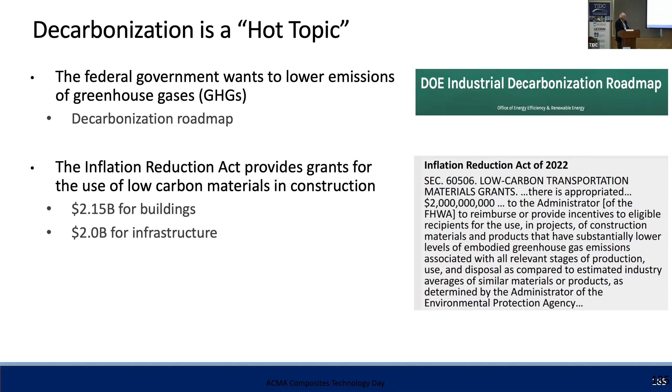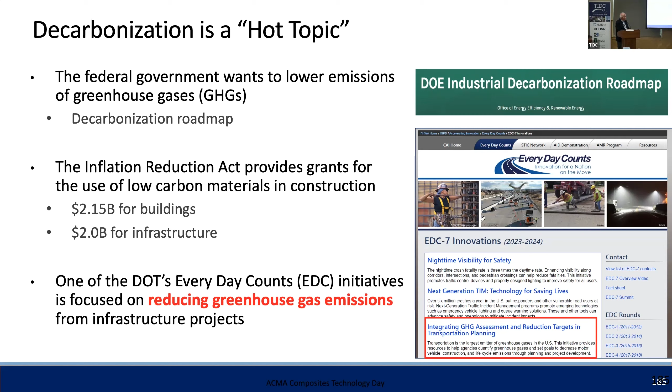One of the Department of Transportation's current Every Day Counts, or EDC-7 initiatives, is focused on reducing greenhouse gas emissions from infrastructure projects. That's hard to get used to.

So with that background, here's an outline of my talk. I'm going to give you a little bit more terminology. Then I'm going to tell you about some sources of data for embodied carbon calculations. Then I'm going to show you some examples of both lower cradle-to-gate and cradle-to-grave CO2 emissions with composites.

I'm going to give you my take-home message now and then repeat it at the end of my talk. My take-home message is that the use of FRP composites can lower embodied carbon and CO2 emissions in construction and infrastructure applications. It's a very simple message, but I hope you'll see it's true for both cradle-to-gate and cradle-to-grave emissions as I go through the rest of my talk.

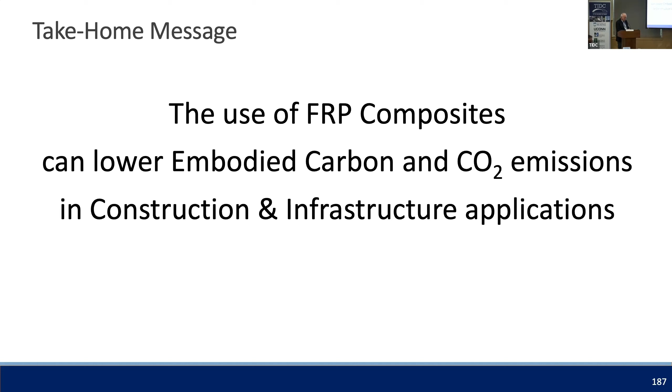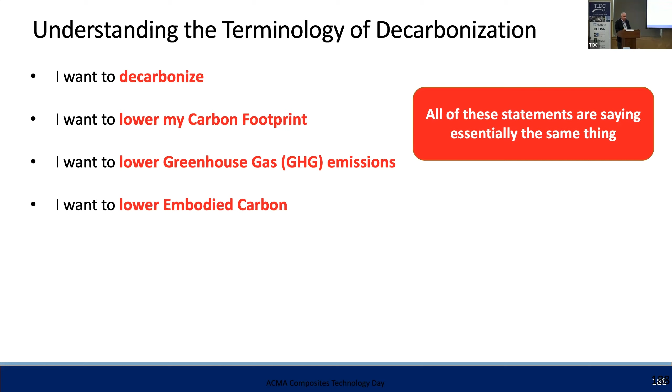So people say they want to decarbonize, but different people say it in different ways. Some people say that they want to lower their carbon footprint. Others say they want to lower greenhouse gas or GHG emissions. Still others would say, I want to lower embodied carbon. The point that I want to make is that all these statements are saying essentially the same thing. Everybody wants to lower emissions of carbon dioxide.

And then there is upfront embodied carbon, or cradle-to-gate emissions, which focuses on the greenhouse gas emissions released before a building or another structure is constructed. These are also referred to as supply chain emissions or product stage emissions. Again, they are the upfront embodied carbon, the upfront cradle-to-gate emissions.

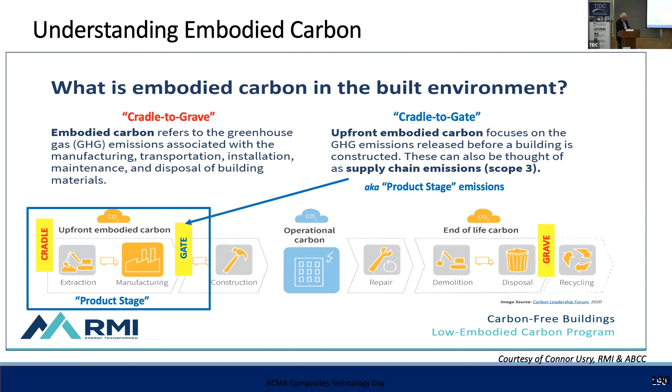A little bit more terminology. Everyone wants to lower carbon dioxide because it is the most abundant greenhouse gas, but it is not the only greenhouse gas. Gases like methane and nitric oxide are also greenhouse gases, and each of those gases has what's called a global warming potential, or GWP. And that GWP is used to calculate equivalents of CO2 emissions. So now let's talk about some sources of embodied carbon calculations, sources of data. The most common unit is kilograms of CO2 equivalents, and you will see this acronym, kilograms CO2e, for kilograms of CO2 equivalents, and you'll see it repeatedly during the rest of my talk.

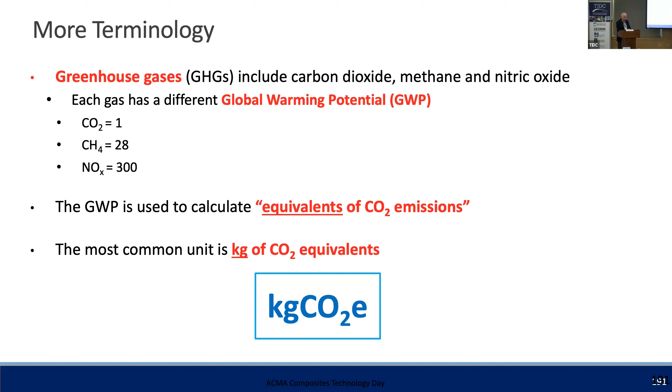I also want to make the point that it's very important to watch the units when you're going through this database, because this data for steel is given in kilograms of CO2 equivalents per kilogram. But if you look at the data for concrete, it's in kilograms of CO2 equivalents per cubic meter.

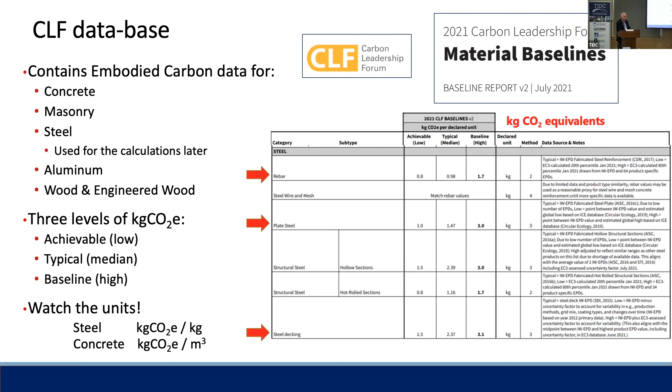A little bit more about the scope of the CLF database, and this comes right from their description of their database. The CLF Baselines report gives you product stage carbon impacts, or cradle-to-gate impacts. They point out that these emissions comprise the majority of embodied carbon impacts for the majority of materials.

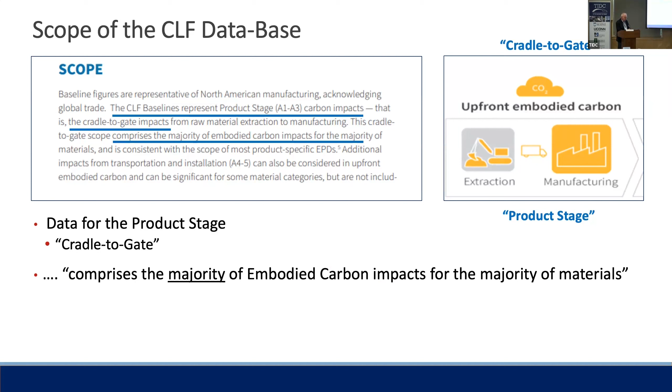Now let's look at some source data for FRP composites. Here we're looking at the life cycle inventory from ACMA. Again, this is cradle-to-gate, which is the same as the CLF database. This database contains embodied carbon data for unsaturated polyester resins and e-glass. It also contains data for composites prepared by different fabrication methods.

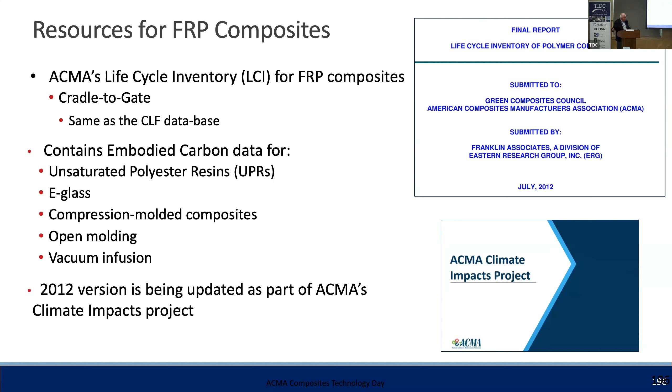This version is from 2012, and it is being updated as part of ACMA's Climate Impacts Project, which was launched last year. Here's the type of data that appears in ACMA's LCI.

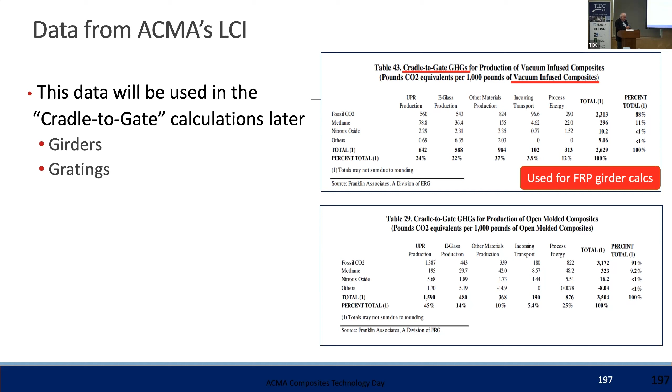Again, you're talking about cradle-to-gate data. Here's the cradle-to-gate emissions data for vacuum-infused composites. I'm going to use it for the FRP girder calculations in just a little bit.

And here is the data for open molded composites, which are going to be used for the grating calculations that I'll show you. Again, if anyone would like a copy of this LCI, email me after the fact.

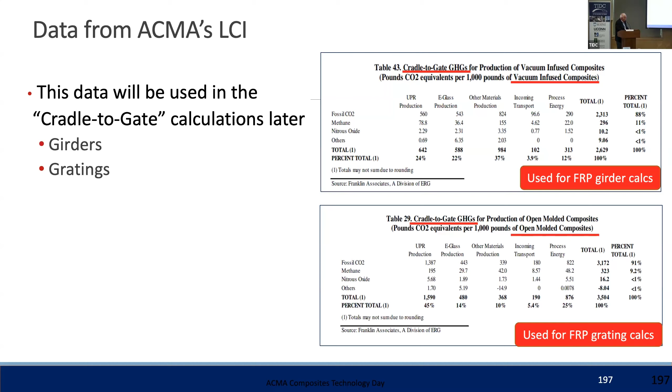And finally, we get to environmental product declarations, or EPDs. These are also typically cradle-to-gate. Some of them do contain emissions data for downstream emissions. I have found that buildingtransparency.org is a very useful resource for EPDs.

Here I'm showing you the EPD for FRP rebar from Schock, a German company, and I'm going to use the data in it for the rebar calculations shortly.

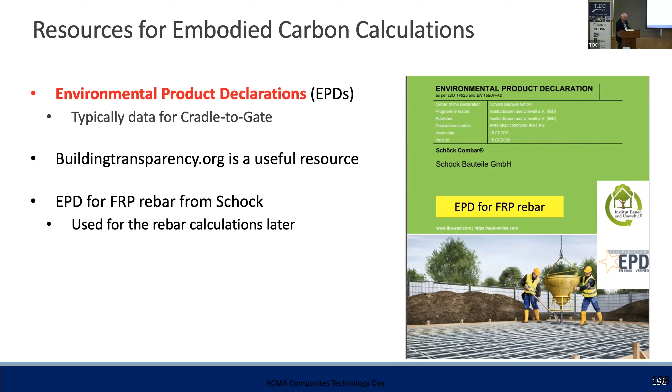Here are some of the emissions data from that EPD. I'm going to highlight 2 sections of this table. At the top, you've got a description of the different stages, and what we're focused on here is the product stage that I defined earlier. That's the same as the CLF database for steel. Then you've got the emissions data for that product stage, given in kilograms of CO2 equivalents. I'm going to use this data for the rebar calculations.

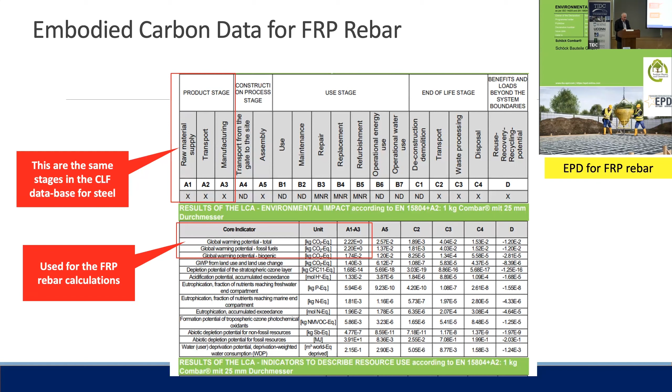So the point I want to make is that I've shown you 3 different data sources, but using data from these 3 sources enables apples-to-apples cradle-to-gate comparisons.

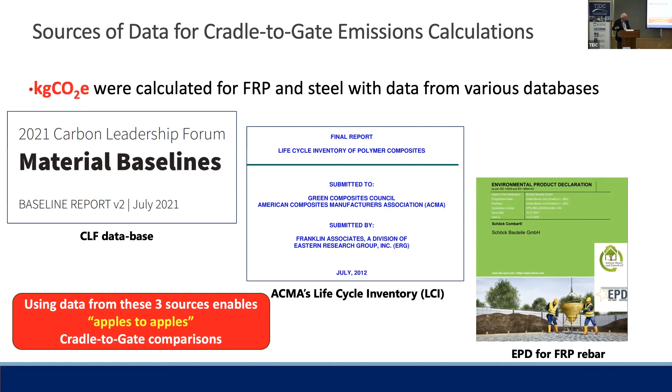So now let's show some comparisons, some calculations for cradle-to-gate. I'm going to show you 3 different comparisons: FRP and steel rebar, FRP and steel girders, and FRP and steel gratings. Again, cradle-to-gate.

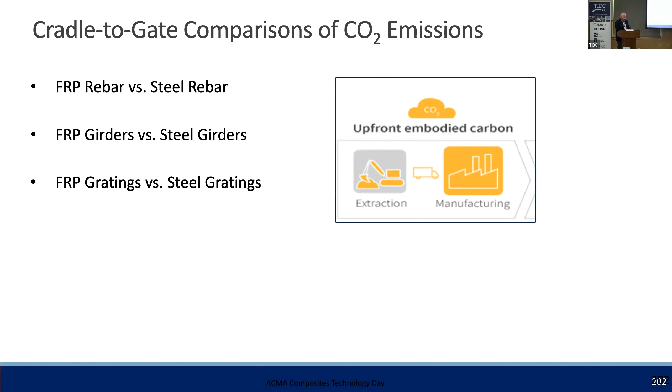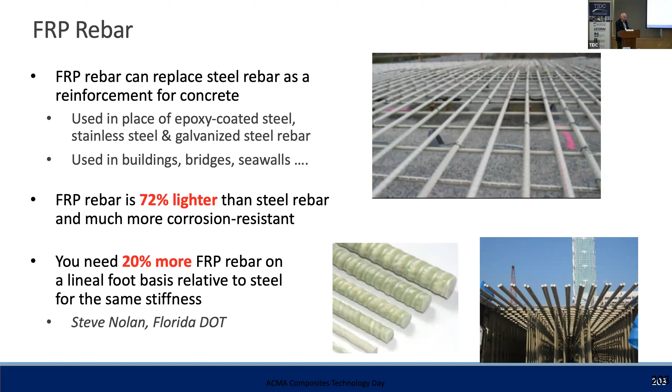So let's talk about FRP rebar. John talked quite a bit about it in his talk. It can be used as a replacement for steel rebar in concrete. It's used in all kinds of buildings, bridges, and seawalls. It is 72% lighter than steel rebar and much more corrosion resistant. But when you use FRP rebar, you need to use 20% more on a lineal foot basis relative to steel to achieve the same stiffness. That's per Steve Nolan from the Florida DOT, who I want to acknowledge here, and I'll mention again later when I talk about the Halls River Bridge LCA.

So now let's do some math. What I'm comparing here is steel rebar versus FRP rebar. For the steel rebar, this column contains the source data. I'm using the CLF database, and remember there are 3 different levels given. Here are those values for kilograms of CO2 equivalent per kilogram. To keep the math simple, I've made it weigh 1,000 kilograms. This column is simply the product of these 2 columns.

Then I come down here for FRP rebar, and now I'm using the data from the Schock EPD. When I calculate the weight, this number reflects the fact that FRP is 72% lighter, but that you need 20% more. When you take this product, you get 739, which is much lower than the values higher up in this column. When you do the math, this new column shows the percent reduction that is possible with FRP. The data shows that CO2 emissions are at least 8% lower with FRP rebar, 25% lower than for typical steel rebar.

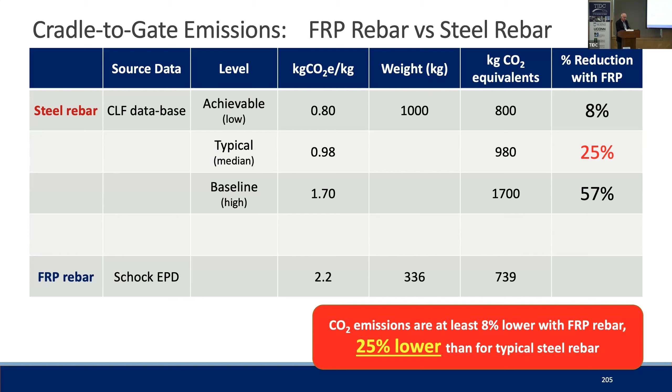Next, let's talk about FRP girders. I think many people in the audience are familiar with these, so I'll go through it pretty quickly, and Bill's going to talk about it. This is technology developed by the University of Maine, commercialized by AIT. The girders are typically prepared by infusion with vinyl ester resins.

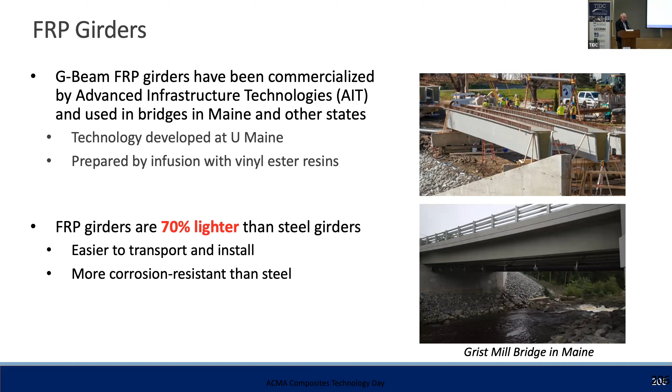They are 70% lighter than steel girders, making them much easier to transport and install, and they are much more corrosion resistant than steel. Let's do some more math.

Again, now I'm using the steel data from the CLF database for plate steel, 3 different values. For the FRP girder, I use data from ACMA's LCI for vacuum infused composites, which I showed you earlier.

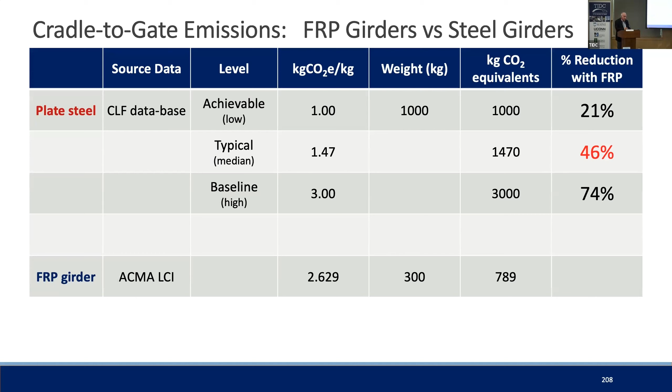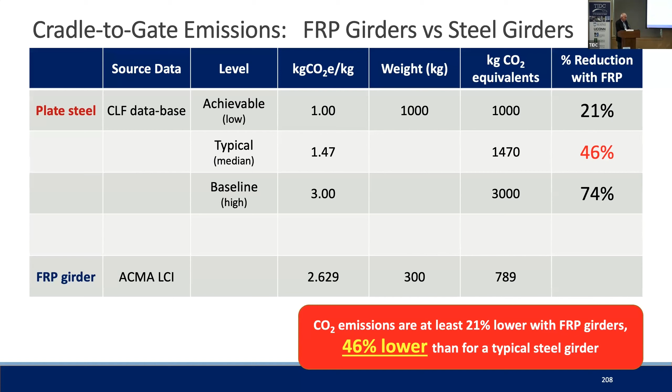FRP is 70% lighter. You do the math, and this new column shows you even more impressive reductions in FRP relative to steel. It shows you that CO2 emissions are at least 21% lower with FRP girders, 46% lower than for a typical steel girder.

One last example. Here I'm going to be talking about gratings, deckings, and railings. These type of products are produced by numerous fabricators, people like Strongwell and Amico Seasafe. They are used in the oil and gas industry for offshore drilling.

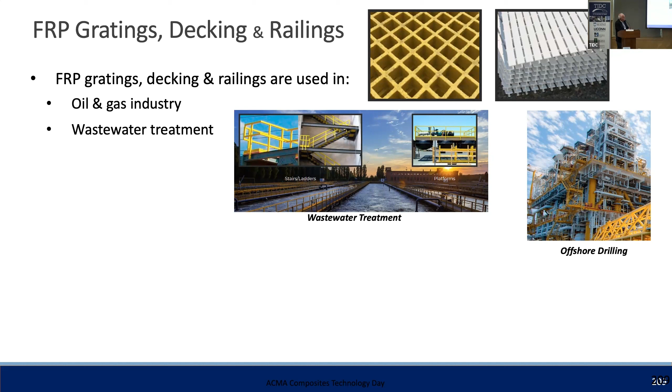It's not for bridges, but many bridges do have railings and ladders and gratings. Again, these gratings and decking are 73% lighter than their steel counterparts, and they are much more corrosion resistant than steel, which is important when you look at the highly corrosive environments that they're being used in.

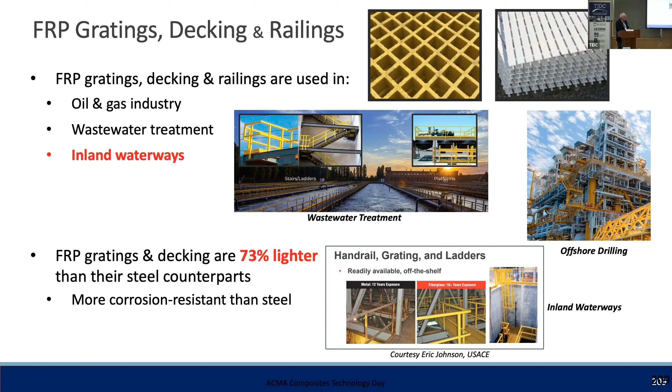We'll do the math one more time. Now for the steel decking, I'm using data from the CLF database, 3 different levels. I come down here to the LCI from ACMA, and I use the data for open molded composites, which is the way that Amico Seasafe produces their gratings.

Again, you do the math. FRP is 73% lighter. You get that 739. And the percent reductions with FRP are the highest yet. You've got at least 37% lower with FRP, 60% lower than for a typical steel grating.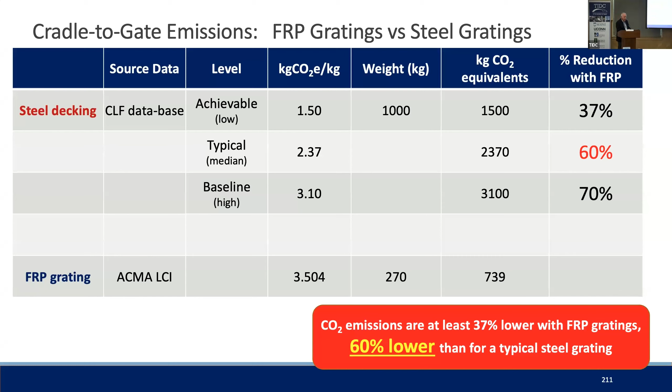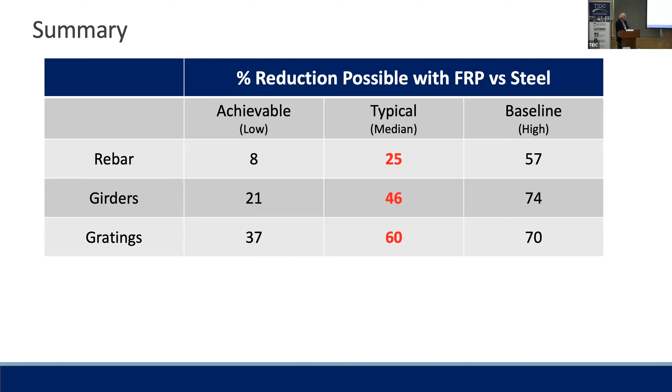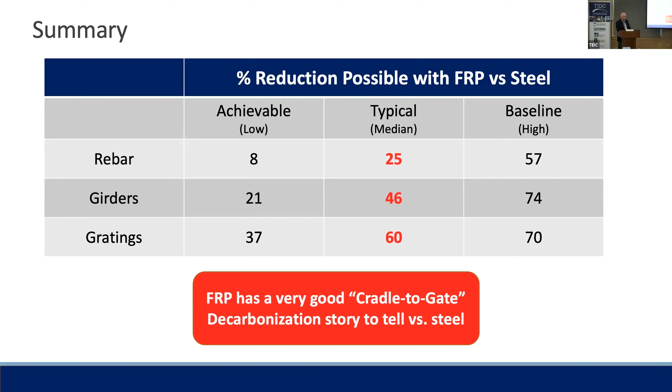So to summarize the 3 examples, here is the percent reduction possible with FRP versus steel. For rebar, you're from 8 to 57%, girders 21 to 74%, gratings 37 to 70%. The bottom line from this data is that FRP has a very good cradle-to-gate decarbonization story to tell relative to steel. So far we've talked about cradle-to-gate,

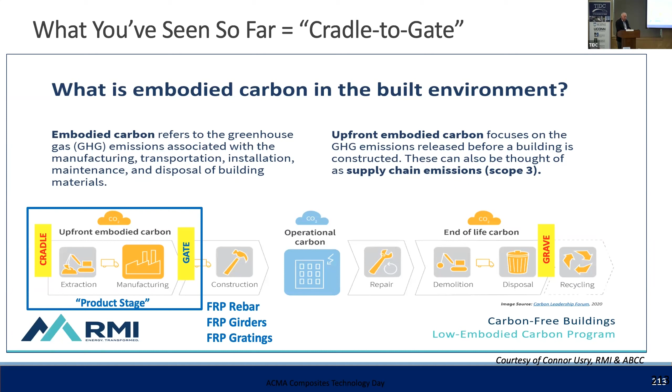3 different examples. Now we're going to talk about cradle-to-grave. And to do that, I'm going to show you data from the life cycle assessment, or LCA, that has been conducted for the Halls River Bridge.

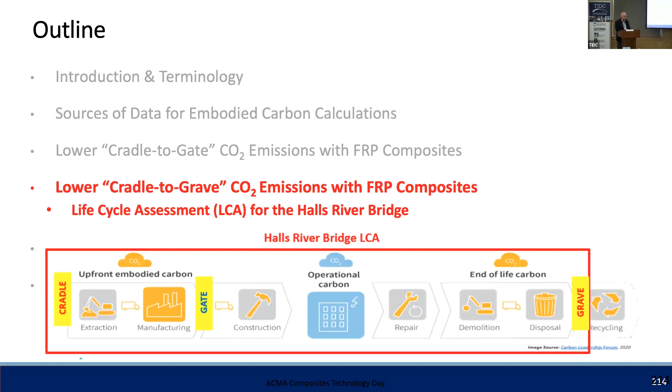Here's a picture of that bridge. It is located in Florida, north of Tampa. It's 186 feet long with 5 spans, completed in November of 2019.

This is an article from Advances in Civil Engineering Materials. The authors include Thomas Cadenazzi from the University of Miami, Professor Tony Nanni, who was Thomas's PhD advisor at Miami, and Steve Nolan from the Florida DOT. They have conducted a life cycle assessment, LCA, and a life cycle cost assessment, LCCA, for the Halls River Bridge.

This is by far the most detailed, most comprehensive LCA and LCCA I have seen for FRP in an infrastructure application. I could spend 2 hours just going through this paper, but here's the Cliff Notes version. Their LCCA showed that the net present value of the life cycle cost is 20% lower with FRP because of reduced maintenance and replacement costs. That's a good story for FRP. That's a story for a different day.

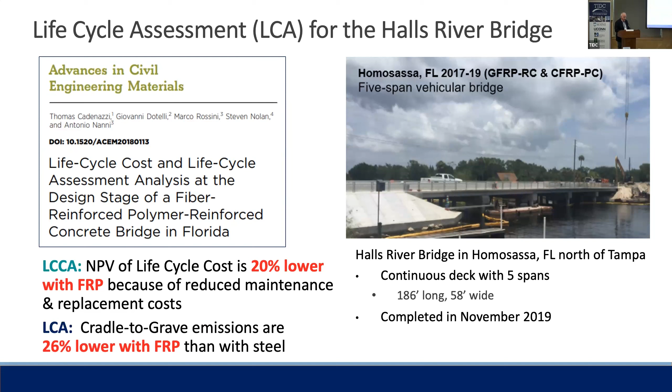Relevant today is that their LCA showed that cradle-to-grave emissions were 26% lower with FRP than with steel. And here's the data that shows that. The table at the top contains the emissions data in kilograms of CO2 equivalents for the bridge with FRP elements versus the one with steel elements.

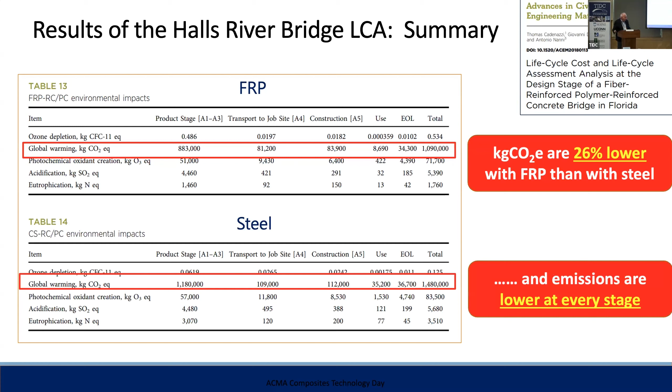And if you compare this data point with this data point, you will see that the emissions are 26% lower with FRP than with steel. And they are lower at every stage in the process.

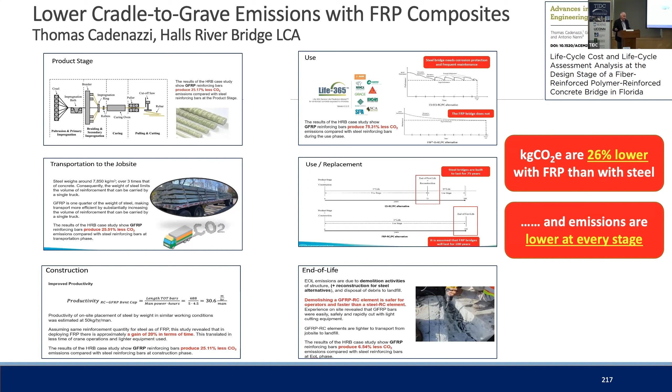And again, the bottom line is that the kilograms of CO2 equivalents are 26% lower with FRP than with steel, and they are lower at every stage.

So I'm going to finish up with my take-home message one last time, that the use of FRP composites can lower embodied carbon and CO2 emissions in construction and infrastructure applications. I've shown you 3 examples for cradle-to-gate, where the emissions were 8 to 74% lower, and the Halls River Bridge analysis showed you that for cradle-to-grave, 26% lower with FRP than with steel.

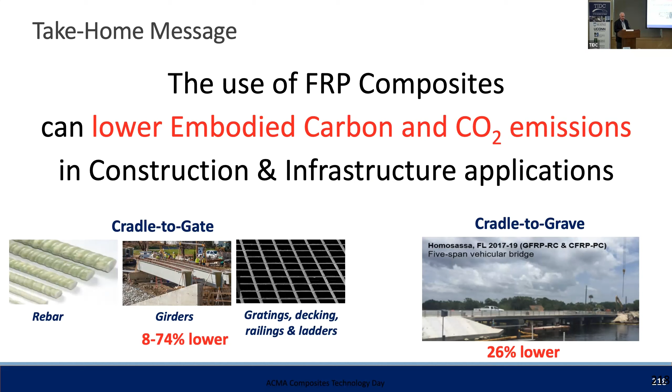And so the final take-home message is, if you want to decarbonize, if you want to lower embodied carbon, if you want to lower carbon dioxide emissions, you need to be considering FRP. And that concludes my presentation. I'll be happy to answer any questions during the panel.